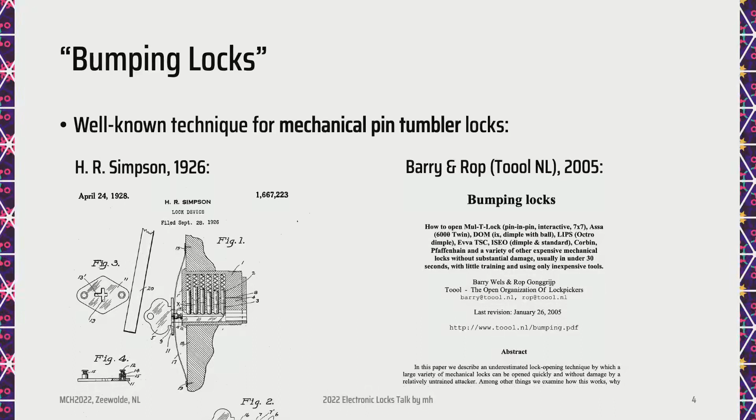Okay, start with bumping. You have heard about bumping, I'm very sure. For mechanical locks, there was a patent early in 1926, and then in the early 2000s it was made public again, also by some people here in the Netherlands. There was Barry and Rop from Toool, they wrote a paper about it.

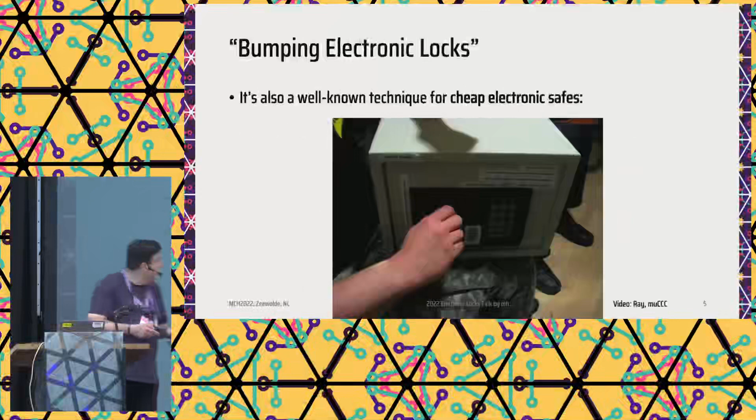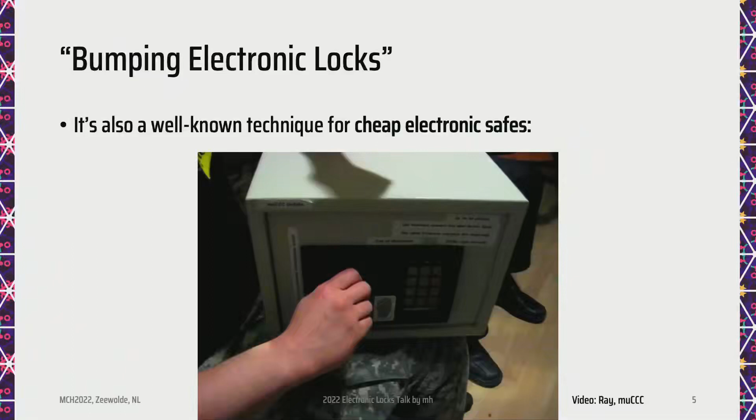And what you probably also know is bumping cheap electronic safes. So that is a well-known technique. You can use a potato or a fist or whatever. And here you see Ray bumping open a safe at Munich CCC. So you probably have seen that, right?

And most people who know something about locks also know that this is because of the solenoid in these cheap safes. And yeah, they have become an anti-pattern in mechanical lock design or in electronic lock design, because they are so easy to manipulate from the outside.

So people generally accept that motors are a more secure way to lock something.

Okay, but I did find a modern lock with a solenoid, and this is now a lock-specific mechanical attack on a very specific lock.

This is an electromechanical lock with mechanical keys, and the keys also have a little chip in there and electrical contacts that you can see here.

Here I actually covered them up with a little bit of tape. And just by the way, in this presentation, I typically put the left side of the picture as the secure side on the inside of the door, and the right side of the picture as the outside. In this case, you would have the key on the outside and a knob on the inside.

Yeah, let's try that. So you can see that now, right? Okay, so this is the correct key. It will beep once, and now I can turn it. This is the modified key with the pins covered. The lock does not know it's in there now, but it does know once I start turning.

Well, that demonstration worked too early. So basically, if I start turning, it will now fire the solenoid, and I cannot turn any further. But if I turn really quickly, and I know I can do that, I'm not sure if I can do it live on stage. Let's try. Yes, I can also turn it quickly. It does beep, but it also opens the door. So much for locking out the person you don't trust anymore.

Okay. Now, bumping. As we said, the solenoid is bad. Let's use a proper motor. This little key safe I have here actually does have a motor, and this motor pulls down on a spring-loaded latch. So it's convenient, you can close it, and this latch will close. But...

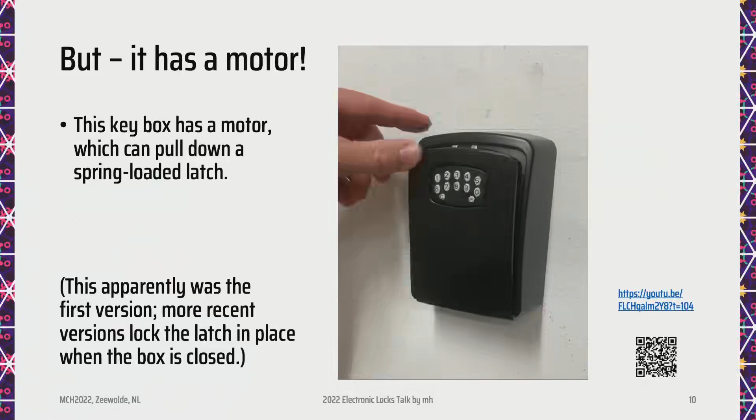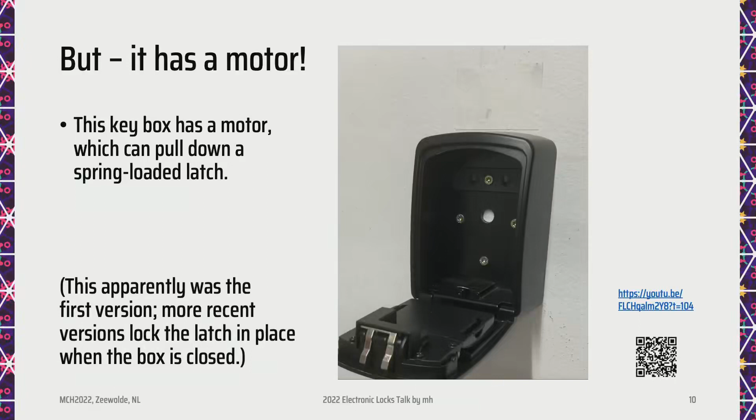Yeah, you can also do the same thing as with the cheap safe. And this has a nice time delay thing to it, so I like to do that. I can also, well, I don't do it on stage here. To be fair, the manufacturer has improved it, and there is now a function where the motor turns the other way around when it senses a close, and this attack doesn't work on the new versions of those anymore. So I like it when manufacturers actually improve the product.

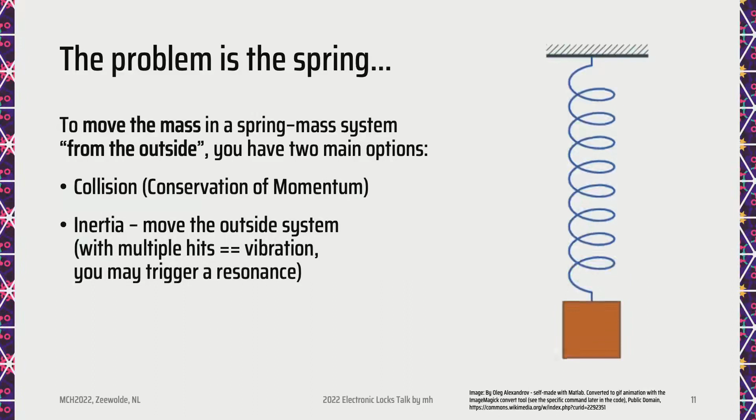Okay, but now we know the spring is the problem, not the motor or the solenoid. It is this coupling or blocking, typically a mass-spring-mass system. And you know spring and mass systems like that—if you want to do something from the outside, you can just hit it, and now a collision happens.

You know this thing called Newton's cradle—you hit from the outside, and if there are collisions, this energy will be transferred. It's called conservation of momentum, for example. The other thing you can do from the outside, if you cannot reach this and it's isolated, is use inertia. You just hit it from the side, it will still start moving. And if you hit it multiple times, there will be a resonance frequency and so on, so you may actually be able to hit it even harder.

So let's test this theory. For this, because I cannot zoom, it would be cool if you could switch to the other camera, please, and have a look at this cylinder and this lock.

So as you know, these electromechanical lock cylinders work like this. You have on the inside the opportunity to open and close the bolt, but on the outside, you can only do that after authentication. Because then the motor will move something, so now it's free spinning and it's secure. Supposed it's secure. Okay, let's see.

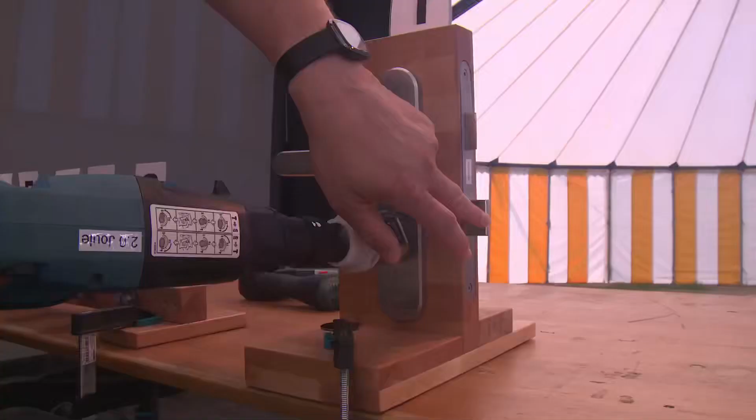I think we can see it on camera, right? Yeah. Okay, so it will be a little bit loud, but only for a short time, and you have to watch this to see that it moves in. Yeah, open. Okay. We will have another demonstration later with the other locks, but let's have a look at them first.

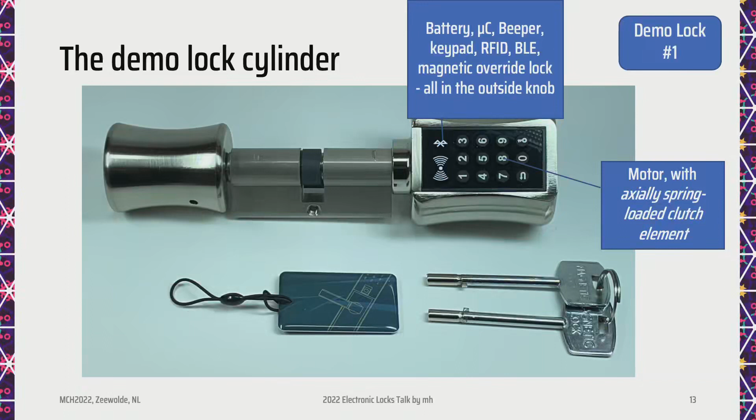So the theory was this—just so you see what I just did, I attacked this lock cylinder. This is a very complicated system where all the electronics are on the outside of the door, including a magnetic override lock, and you can use an RFID chip and everything. But yeah, it also has a spring-loaded clutch, an axial spring-loaded clutch element.

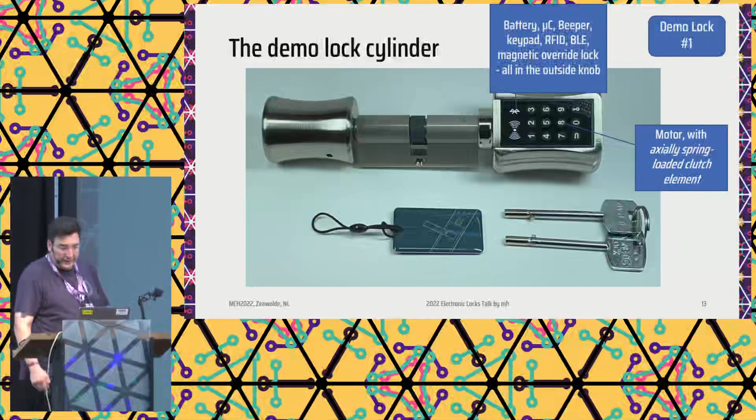Okay, and there are typically some frequently asked questions. The first one is, why test this in a door? Some people in Germany will now be angry with me because lock sport ethics say you should not attack a door, you should only attack a lock, so it doesn't look like we are thieves and want to break in. The only problem with that is you cannot have a real test if you just hold the cylinder in your hand.

I want to show you with this cylinder here—this is an electronic lock cylinder that is not vulnerable to these attacks, at least I didn't defeat it yet. But you can see that this cam, the thing that operates the bolt, it actually turns, even though I didn't put a key here. The thing is though, if I put my finger here, you see it does not turn, so there's a slip clutch. And that is a way to design it so it will not open the door lock if you don't authenticate.

But to test whether this attack works, you have to prove that you can really transmit torque to the cam.

The other thing you may think of: don't put this into a lock where you don't need much torque. So if you have a key switch that doesn't need much torque to activate, this is not the right lock for it. Or if you have something that just blocks based on the cam, like a small safe, you can easily pull it out if you can just move the cam without torque. That's the reason why we have to put it into a simulated door or something like that.

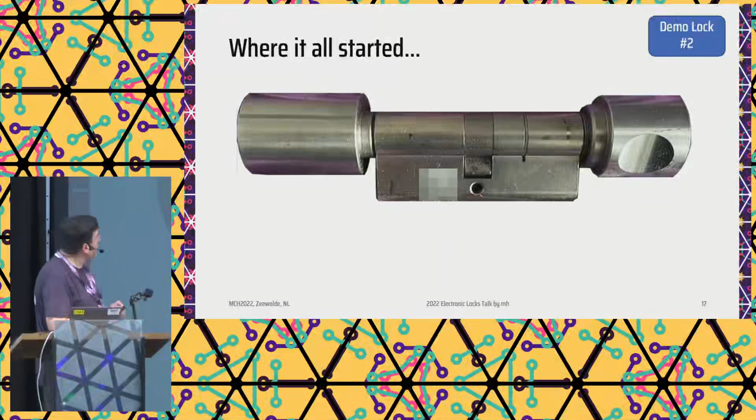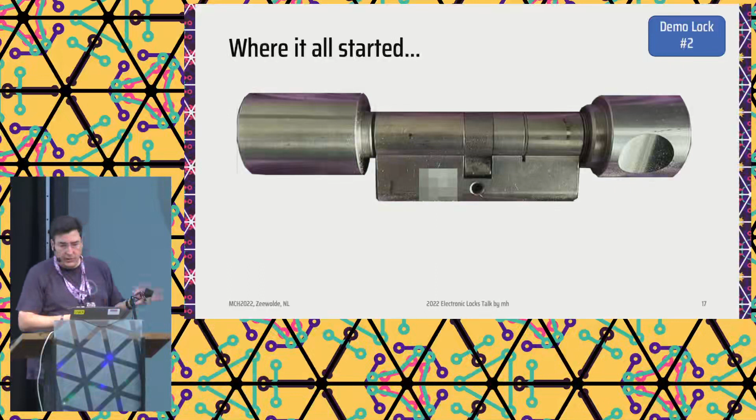I will demo other locks soon, and these are the locks I want to show you. This is where the whole thing started. This is a really old lock from a manufacturer, maybe 15 to 20 years ago. They have two more generations since then that aren't vulnerable to this, but I want to show it briefly. This one actually has a solenoid in here, so if you hit on it, it will move. So that's the first one — it has a solenoid-based clutch.

Then there's a lock with a wired electronic key. When I took that one apart and looked at it, the clutch actually comes out radially, which would be good design. It could have its own problem — if you turn it really fast, centrifugal force might pull it out — but that's not the case here. They designed it well. However, part of the movement is also axial, that's why it's falling to this same issue.

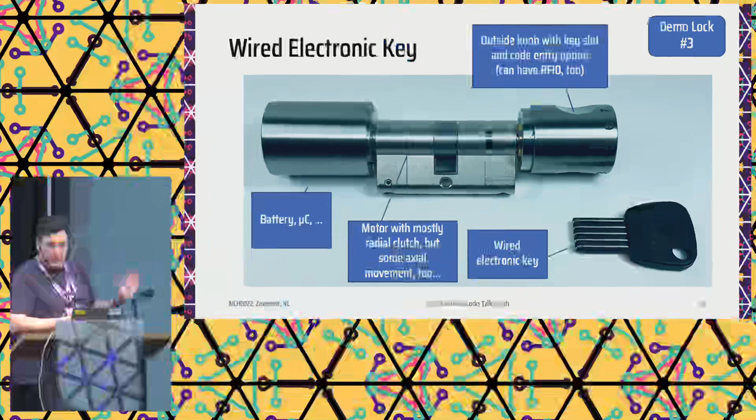While we look at this lock, I promised some other things besides bumping — other mischief. This one also has bad crypto and a time penalty bug. The vendor says the key is read- and copy-protected through a cryptologically encrypted dialog procedure, but that was home-rolled crypto invented by somebody 20 years ago. If you look at the key, you also see there's just a little PIC microcontroller. So what would you expect? Let's have a look, right?

A standard reverse engineering procedure would be to use a logic analyzer to record the transactions. I use Logic, and then look — the physical layer is really simple: a 0, then the bit, then the 1, then the 0, next bit, then the 1. For this type of logic analyzer you can write a low-level analyzer, and then you see the bits. It turns out to be 40 bits, challenge and response.

Teensy is something like an Arduino, but faster. We made an analyzer and wrote some software for that. And then we could actually understand the encryption, which we'll look at on the next slide. But once that is done, we can also simulate the key and then copy the keys.

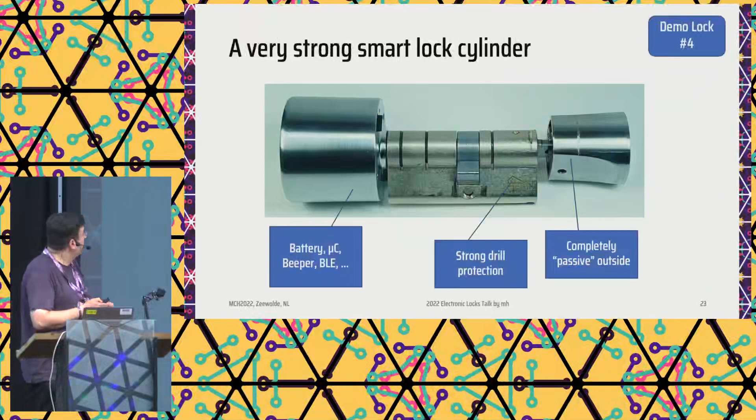Bumping again, another lock. This is a very strong, smart lock cylinder, and it is designed very well because all the electronics parts are on the inside of the door, with only some strong metal on the outside and strong drill protection. You see the SKG 3-star sign here, so yeah, that is a strong lock.

Taking it apart, you can see that there are actually spring-loaded pins, clutch pins. Yeah, that's the problem, of course. If you look at this knob, on the left picture these pins are not engaged, but on the right side they came out. Zooming in, so now they are out, in, out. Now it's coupled, in, out. Yeah, you can see that.

Yeah, and that's the problem that we'll see when we bump it.

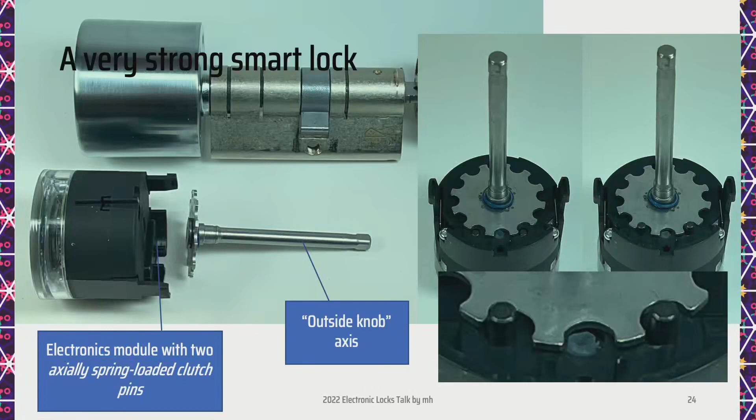Okay, there's a very similar design by another manufacturer. This one even has a mechanical override down here. It's a really neat design, but same problem.

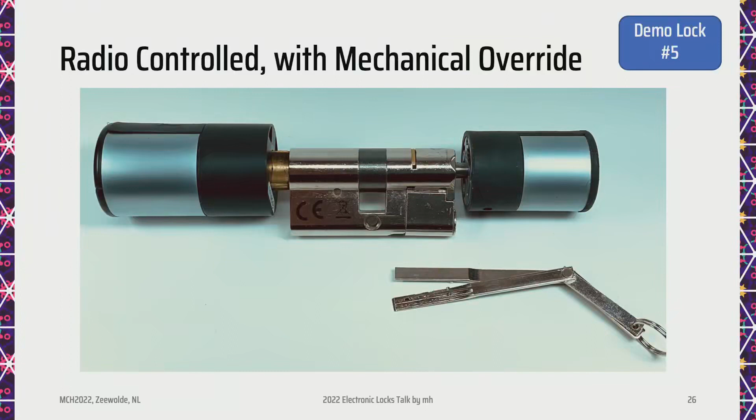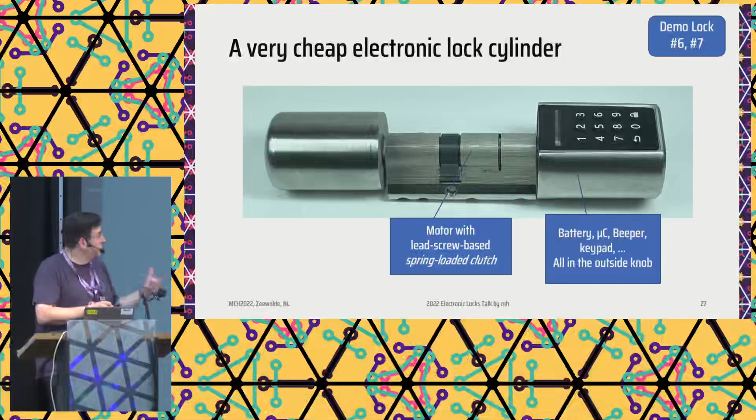Then the locks I've shown before are quite expensive, like a few hundred euros per piece. There's also cheap electronic lock cylinders that you can typically import from Asia. This one has a lead screw-based clutch mechanism again, but spring-loaded, with all the electronics on the outside of the knob. There are actually two generations of them, pretty similar but slightly different.

Then a completely different next generation has actually two little motors in here. It's really nice, like a redundant thing. There are two of them - one can be activated through Bluetooth, and the other one you have to connect a USB override. But both of them actually have the problem we've seen.

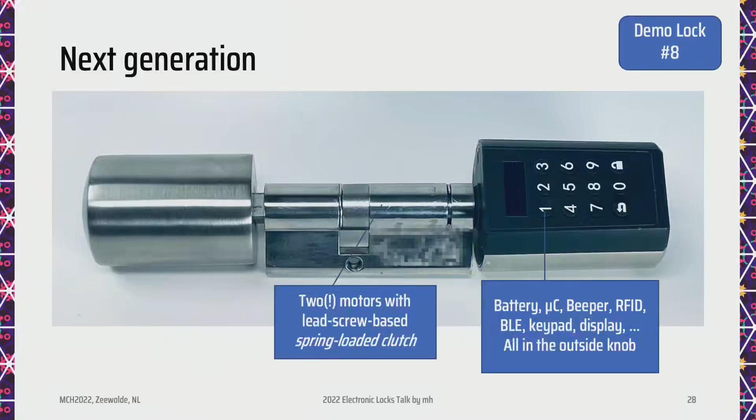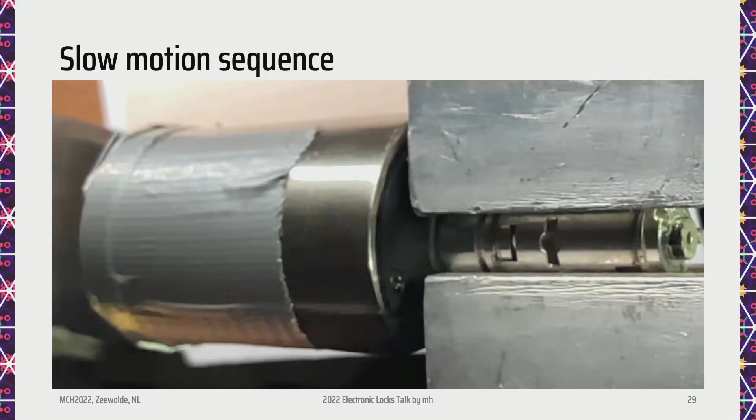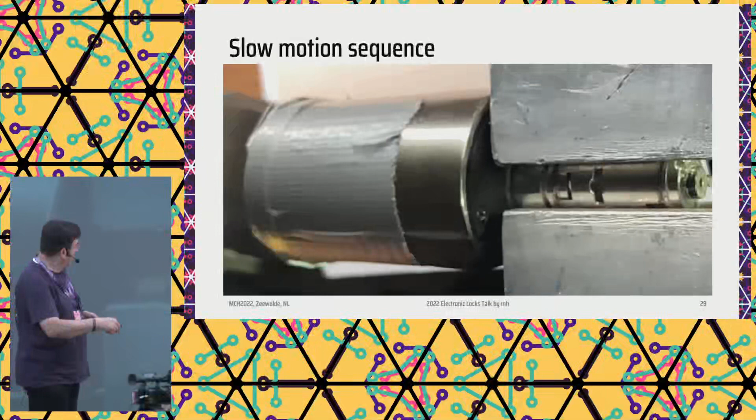I took one apart. It's turned around now, and I made a slow motion sequence. So at the right side of the picture, I'm not sure if you can see it here, but there is this clutch part, and you can even see the little pin stuck out from the last attempt. And here you can see it's painted black, and when the pin jumps out, you see this black covered.

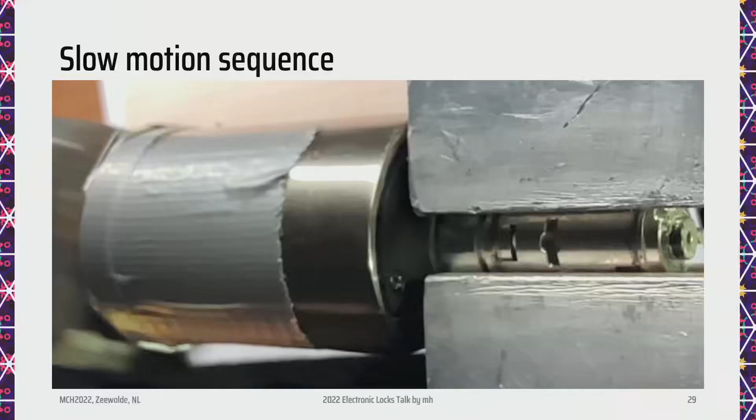Let's see how much we can. So another hammer comes from the left, and the whole thing moves, and you see the pin coming out now. And now it's back again, but it's jumping a little bit back and forth. So that's what's happening in there, obviously.

And now let's have the camera switched again, please, and we just do it live again on these locks. So number 2 is the very basic one with the solenoid.

One thing I want to tell you, I didn't make many of these little mini doors. I made little demonstrating things instead. You can see here's a white wheel with a black tooth, and this is to prove that the clutch or the cam was actually transmitting enough force to turn it. So after the attack, the little black tooth will not be at the top, but will be moved, and then you know that it would have opened the door. Okay, let's try. Open.

This one, I didn't put the expensive knob with the key interface and code entry on there, but just a little brass piece, so don't destroy the expensive knob. Open.

That's the strong one with the SKG 3 stars, and it is really strong, maybe. Let's see. Oh. Yeah. Okay. I should have - there's a screw to keep that in. Let's try once more. Open.

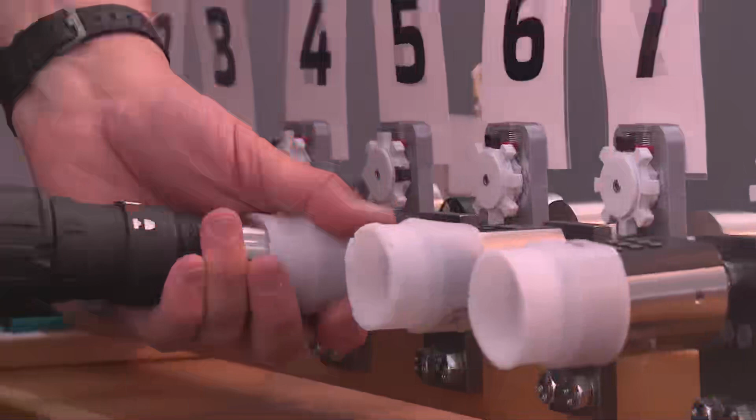Okay, then we have this other very similar one. Open. Now we come to the cheaper versions. Open. Open. Okay, getting there. One last. Open. Okay.

Okay, so I had a feeling like there was a German TV show called Wetten dass, and I just, yeah.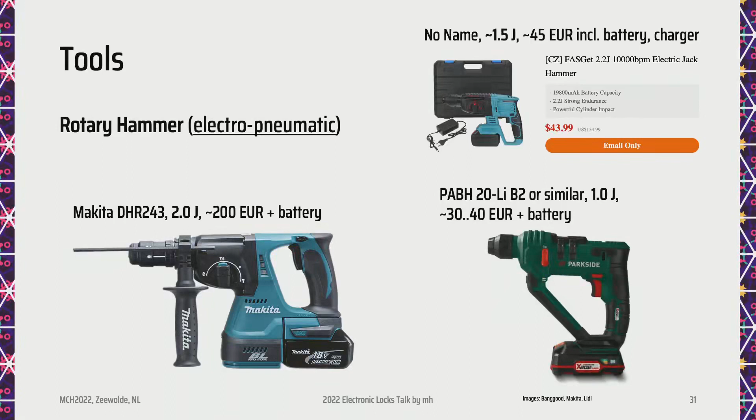Okay, if you want to try it yourself, what you need is a strong rotary hammer. It needs to be a rotary hammer, not just a hammer drill. There's this electro-pneumatic thing that really puts some joules of energy into each of the hits. This one does 2 joules. A very cheap one imported from Banggood or AliExpress or whatever does about 1.5, although they claim more. And this one, you get it at Aldi or Lidl and so on, has like 1 joule, and for many of them it works.

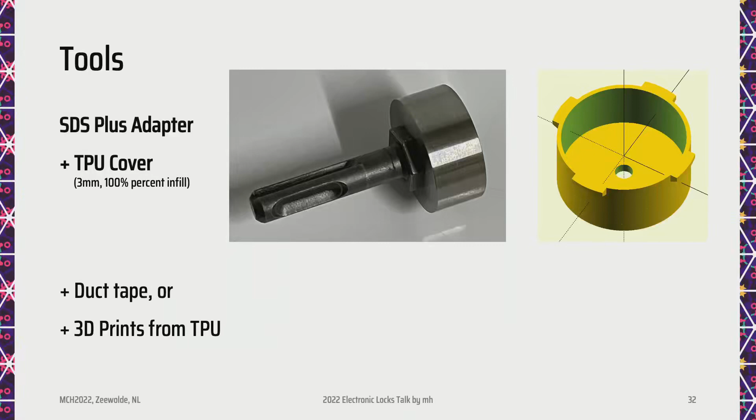You would need something like an adapter, because if you just use the typical drill bit, you will drill a hole, but you need something that distributes the force over more surface. I made TPU covers with 3mm TPU, and then you can either use duct tape to tape it to the knob, or what I did is make some adapters with different diameters.

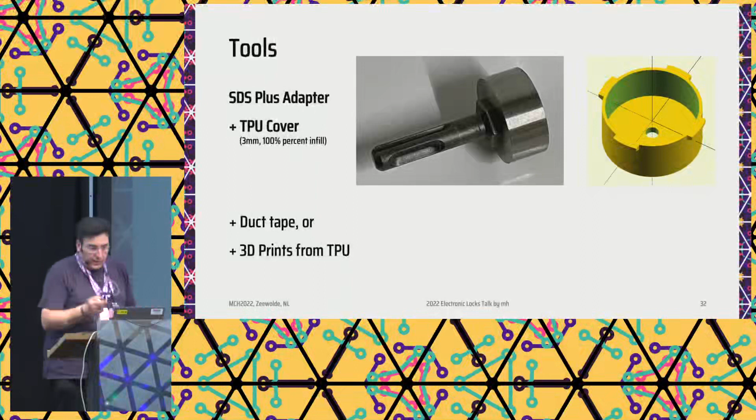Okay, some little other mischief I promised. I wanted to buy a time lock for a certain reason - I will show you, but it turned out this is a sex toy. But anyway, the attack is called fault injection, and the thing is, you can reset some very cheap electronics with this EMP device, sold advertised as a device that makes slot machines pay out money, but it can really only disturb or reset the cheapest of electronics.

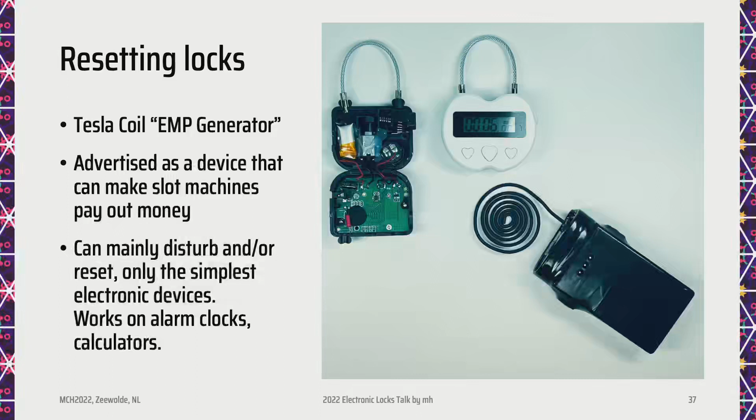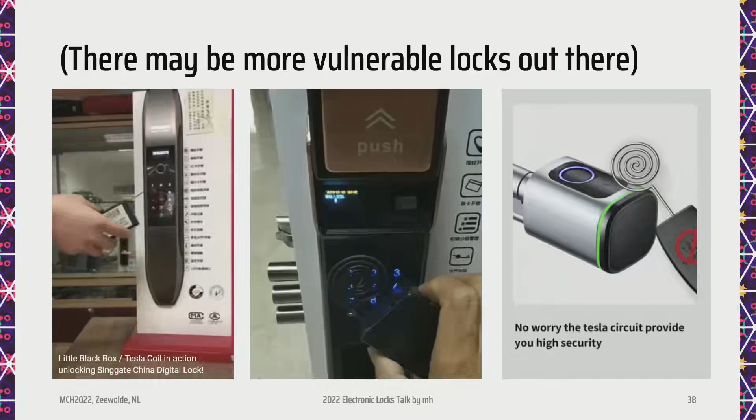Like this lock, it doesn't work. And obviously, maybe there are some others - some ads say there are some Chinese locks that it is effective against, and then there's a lot of ads that say it's not effective against this.

Something that is effective sometimes is a rotating magnet. If you look at how to influence the motor from the outside, what you could do is, if you have a really strong magnetic field, you could actually superimpose that over the existing magnetic field, and then the motor will turn the other way around. The other thing you can do is pull the iron core of the magnet, of the motor.

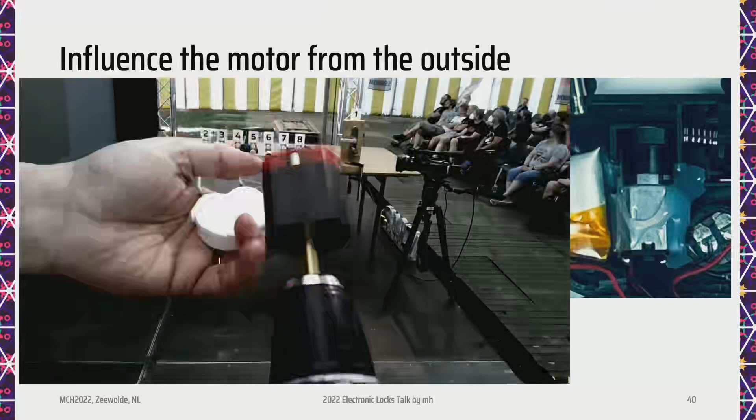So I got this time lock now. It's set to 33 minutes still, so it doesn't open. You cannot push this button in. But here I have a magnet - it's North Pole, South Pole on these sides, diametrically magnetized. And if I just put this here and turn it, I can now open the lock, right? And I can also close it again. Yeah, okay.

What else? Yeah, this was pulling. If the motor is inside the knob and you turn it really fast, you may be able to use centrifugal force, or if you do acceleration, deceleration, inertia, to actually turn something.